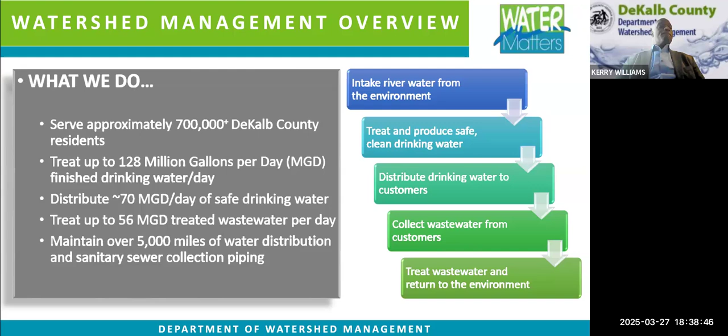And to serve you, we also maintain the system, which consists of roughly 5,000 miles of pipe, several pump stations, and a lot of other things that you can't see, but we do on a daily basis. Let's go ahead and proceed to the next slide, please. Here we have a schematic of the sewer system itself. As you can see, it's a gravity-fed system. You have a lateral that connects your house to the sewer system.

This is one of the places where we can get what we call I&I, infiltration and inflow, rainwater getting into the system, taking up capacity in the system. That is one of the issues that will be addressed by this project, putting in new pipe to get out the inflow and infiltration that's taking up capacity in the system. Right now, we're looking to be more proactive than reactive to avoid sewer spills that we've experienced in the past. And this is one of the first steps in addressing that, and also in compliance with the consent decree, which we are under right now. Next slide, please.

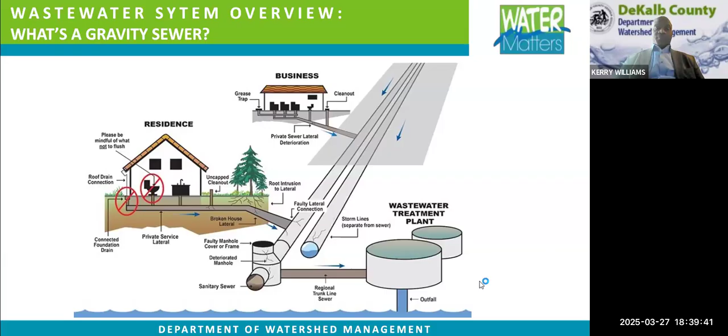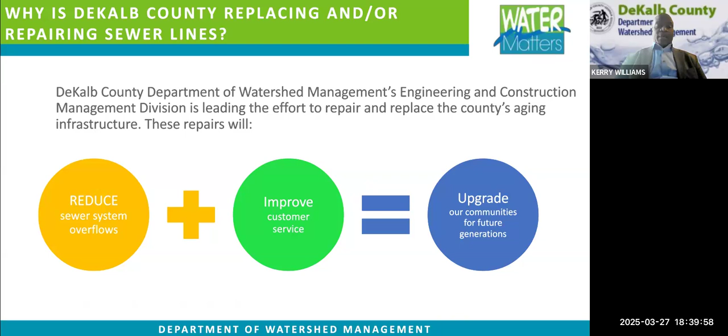So the DeKalb County Engineering Management, Construction Management team will lead this effort. The project has been designed, and we are moving from the design phase now into the full-blown construction phase. Next slide, please. To implement the construction of this, we have not only the DWM professionals that we have in-house, we also are assisted by professional consulting engineering firms and contractors, such as AECOM, Jacobs, Black & Veatch, Gresham Smith, CERM, Kimmy Construction.

You've heard a lot from me now, and so now it's time to really get into the project, the assessment of it, how we assessed it, the problems that we found, and what's going to be addressed with this. To do that, I'm going to turn it over to Ms. Alia Johnson, who is the engineering manager for ECMS, and she will give you assessment and problem. So, Miss Alia, the floor is yours.

Thank you so much, Kerry, and good evening, everybody. My name is Alia Johnson. I'm an engineering manager for engineering, construction, and management services. So my team is leading the design aspect of the consent decree project, including this project in Columbia Woods or Toney Drive. And today I'm going to talk about the assessment and the problem and explain to you all a little bit about why we need to do this project. Next slide, please.

So why do we need to do the assessment? Typically before we identify what needs to be done, we need to know what the problem is for this specific area. So I'm going to walk you through certain methods that we use to identify issues in this area. There's a more complex or more simple way of doing this. So basically the first one that I'm going to discuss in brief is the smoke testing. We did the smoke testing where we put smoke inside the sewer main, and this is to help identify the private connection or any defect in the sewer lateral.

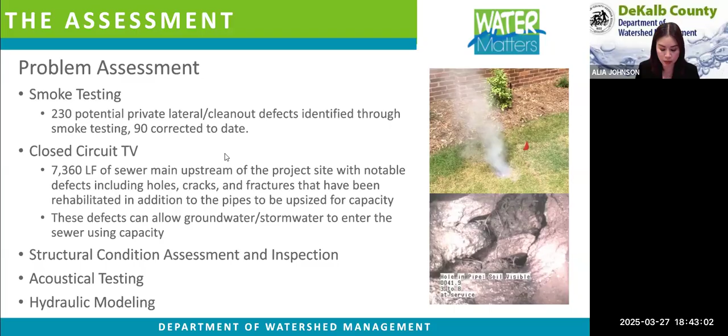So we did a little bit over 7,000 linear feet of CCTV inspection, and we have identified that the pipe has several cracks or fractures and holes within the pipe that need to be rehabbed, and some of them probably need to be replaced, and also increasing the size for future capacity. And some of the low-hanging fruits, from the visual inspection of structural conditions, such as the lateral clean-out cap that we need to replace, or the vented manhole lid that we need to repair to prevent the flow from coming inside our system.

And other methods such as acoustic testing to see blockage in the line, or the hydraulic modeling just to understand if the pipe that we have in the system has enough capacity, or do we need to increase the size to handle the future development. Next slide, please.

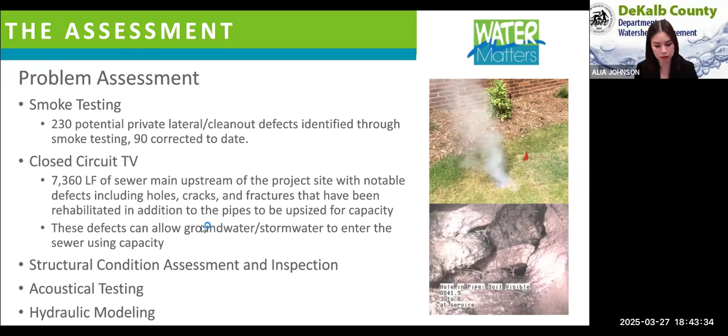And after the assessment, we have identified the problems in this area. Based on the record of sanitary sewer spills, or what we call SSOs, there is a history of repeated SSOs, 43 events since back in 2017 in this area. And the most recent one just happened last month, February 13. So because of that, when there's a sewer spill, we do need to address that, since we are under the consent decree, like Kerry mentioned earlier, and we need to fix the issues by a certain deadline.

And in this area, the first box, the priority fix list, PFL, is what needs to be completed, and this is required by the EPD. There is a specific address at Trasher Circle that was on the list by the EPD to be completed by a certain deadline. And also within this area, the aging infrastructure. As you may know, the sewer system is old; most of it is more than 70 years old. A lot of the time we can't clear the issues just because of the age of the infrastructure.

Next is the lack of capacity. I did mention earlier that we typically try to understand if the pipe in the system is enough to handle the future development in the next 50 years or so. So we need to look into the future so we don't have to come back and increase the size again. So this area does need to increase the size of the system.

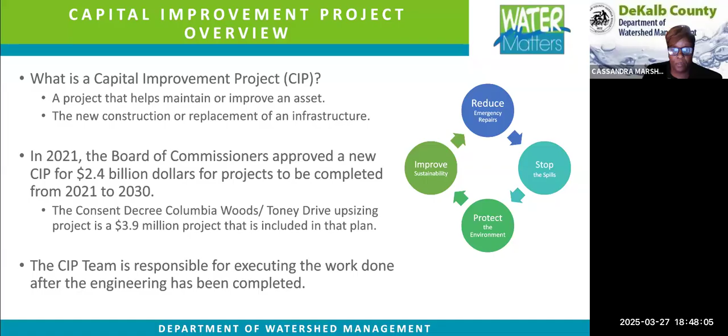You will now hear from Kian Baniassad about the project scope. Thank you, Ms. Marshall. Good evening, everybody. My name is Kian Baniassad. I'm one of the senior engineers with ECMS. I'm also the technical project manager for this project.

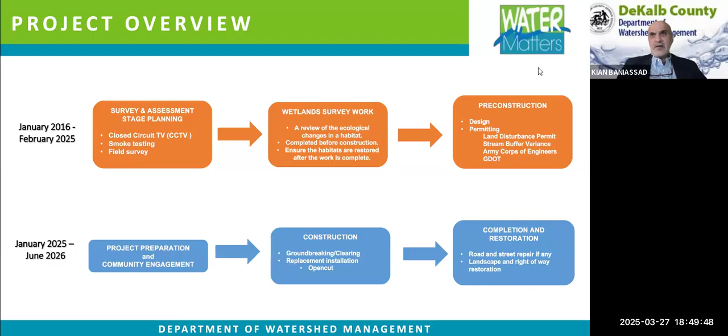This project includes upsizing approximately 458 linear feet of pipe with a 20-inch ductile iron pipe, 2,614 linear feet of pipe with 18-inch ductile iron pipe, and 19 linear feet of pipe with 8-inch ductile iron pipe, for a total of 3,091 linear feet of pipe that would be upsized. As part of this project, we are also rehabbing or replacing about 18 manholes.

Most of the installation will be performed by conventional open cut excavation or pipe bursting methods. During the construction, we maintain our sewer services by bypassing the area under construction from an upstream manhole to a downstream manhole using bypass pumping.

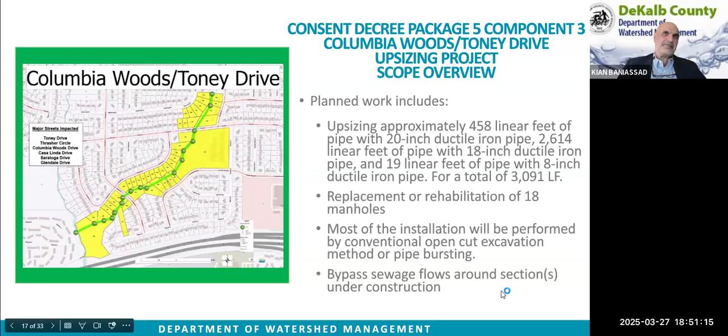At this point, I ask Mr. Arre Kennedy, the construction project manager for this project, to walk you through the construction phase of the project. Thank you. Arre? Mr. Kennedy? Sorry about that. Good evening, everyone.

As Ms. Marshall alluded to earlier, I'm a licensed utility manager in the state of Georgia, but I want to stress two points before I get into what my team and I do, which is the fun part. And that is we take seriously our 750,000 plus or minus ratepayers. And I also want to stress that in this project, there's going to be inconveniences. There's going to be noise. Sometimes, as dictated by the schedule, we're going to be working Saturdays. But we're going to work together in partnership with the community and the contractor to bring this job home.

As the others have said, you've heard the reasons, you've heard the engineering part. My team gets to have the fun part. We're boots on the ground. And we're responsible for the day-to-day operations of the actual installation of the pipe and the overseeing of the contractor, which includes but is not limited to the clearing within the easement, ensuring that erosion and sediment controls are in place, and that the pipe is installed in accordance with the contract documents, the county specs, and documentations. My team and I will also be enforcing the safety habits and the safety rules as they're applicable.

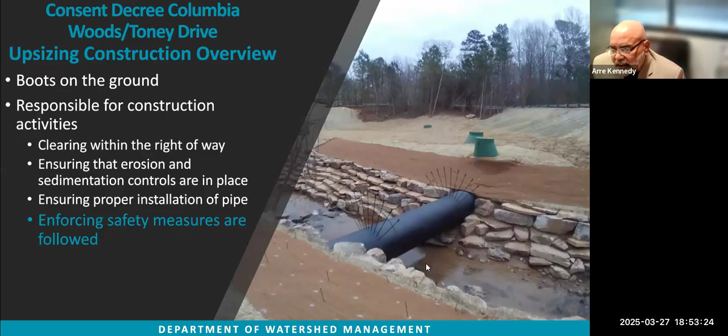Also, I stress that should any of the ratepayers have any issues, that you reach out to us first, the ones out there on the boots, and I assure you that we'll resolve the issue. The methods Kian alluded to briefly. The two methods are open cut, which you see to the left, where basically we're tearing up the real estate, trench box in place, putting the pipe in. The mostly trenchless method is to the right, where we pipe burst, and it's less intrusive and we don't have to tear up as much real estate where feasible.

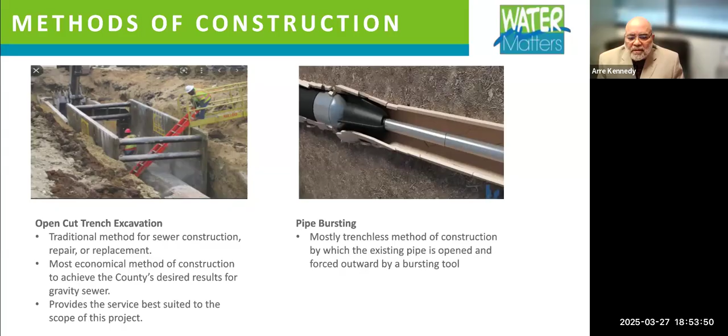The survey and staking has already been underway, as Mr. Kian stated. We want to have mobilization and actually start on this site April 1st. Start putting in access roads, clearing trees, putting in roads, all within the limitations of the easement, April 14th. In May, we want to start actual pipe installation with the contractor. That's actually when we want to start.

January 2025 hopefully will be completed, and February 2026, final restoration and paving. Right now, the end game date is June 2026, but hopefully with my team and the contractor and the weather, we can bring this project in even earlier than that date.

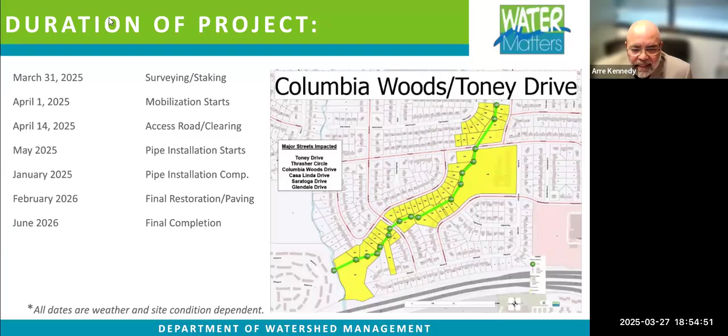As you see, this is a typical construction site, and this is roughly 3,000 linear feet, no small undertaking. As you see to the left, that's the actual construction entrance put in with your silt fence and stuff in place. To the right, we're going to restore it back in kind, if not better. Next slide.

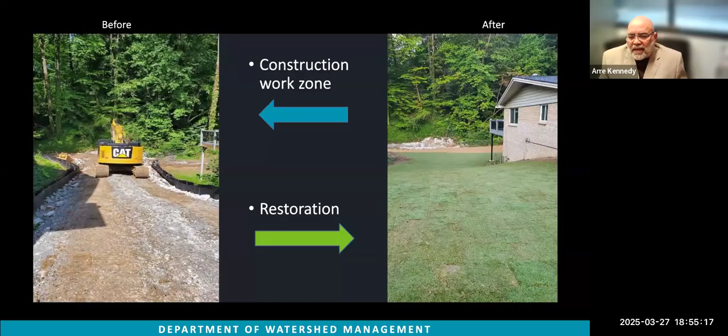I will turn this over back to Ms. Cassandra Marshall. Thank you. Thank you, Arre. I will now address the community concerns and what you should expect. Next slide.

So, like Arre said earlier, there are going to be inconveniences. However, the short-term interruptions provide long-term results. Once we replace the pipe in the area, as previously stated, these improvements should last a minimum of 70+ years. What you're going to see, though, is a lot of construction, a lot of traffic, foot traffic, and vehicles. There are going to be construction workers, surveyors, county employees throughout your community.

What also comes with this is the parking for the crews. They will be parked alongside the streets in your neighborhood and sometimes along the work zone. There will be material and equipment deliveries by means of large tractor trailers. However, the crews and the flaggers will guide these large vehicles in and out of the communities. Also, as an FYI, all of the county contractors and county employees will have an identification badge issued by the county, so you would know who is working for the county on behalf of DWM.

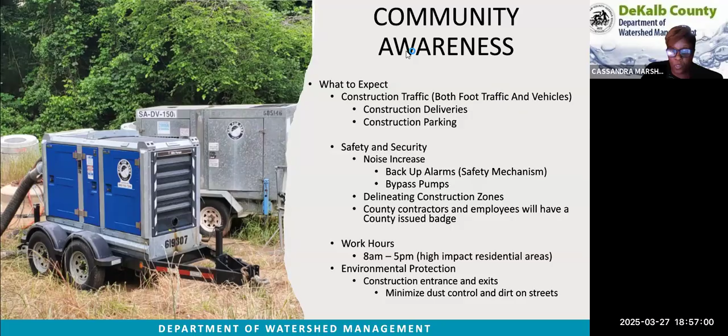There's going to be noise. The equipment is going to have backup alarms. The alarm has to be loud enough for the people in the work zone to hear. This is a safety mechanism. Bypass pumps will generate noise also. This photo is an actual setup of bypass pumps around a sewer manhole. The good news is for this project, the pipe installation will start downstream, and as we're installing the new pipe, we will slowly take out the bypass pumping once we get the new system in place and start putting the sewage back on the new line.

There's going to be dirt on the street. However, as an erosion control measure, the contractor will first install a construction entrance and exit prior to starting any activities. This will reduce mud on the street, but not fully eliminate the issue. If mud or silt is tracked on the road, then the contractor is responsible for sweeping and cleaning those streets daily. Our typical work hours per our contract are 7 a.m. to 7 p.m., sometimes weekends and holidays. However, in high impact residential areas, we will only work from 8 to 5 with the equipment.

And lastly, there will be clear delineation of the work zone. This is usually just shown by installing the black silt fence along the temporary or permanent easement and along the ingress and egress areas. Next slide.

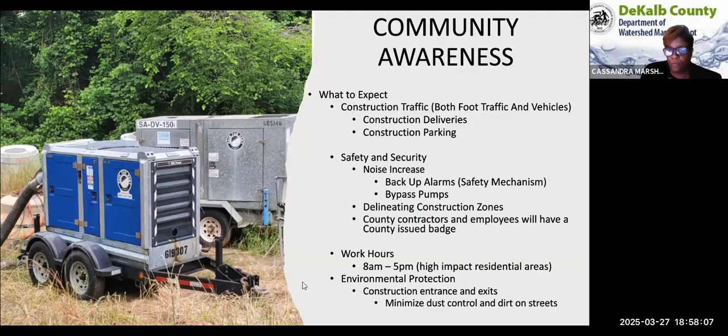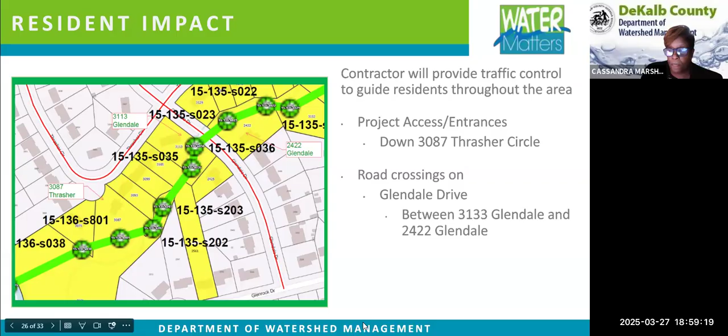So this slide shows resident impacts and locations the contractor will utilize as ingress and egress to the project site. The first location will be coming down 3087 Thrasher Circle. And then off of Glendale Drive, they would come down 3133 or 2422 Glendale for access. Next slide.

This is just a continuation to show the access to the project. The county does have a drainage easement at 3166 Columbia Woods Drive. They will use that as an access point. And lastly, off of Toney Drive between 3230 and 3220 Toney. Those will be access points also. Next slide.

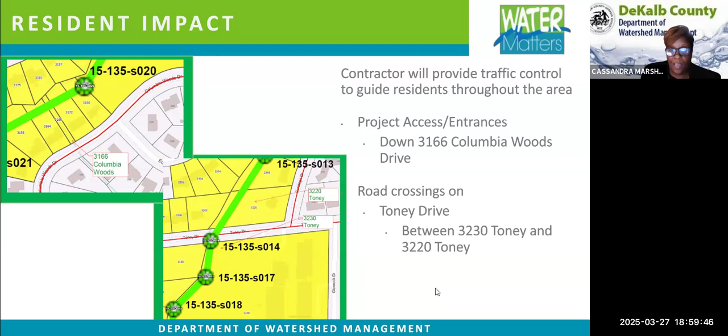Next, you will hear from Public Relations Manager, Ms. Alicia Penny, about public communications updates. Thank you, Ms. Marshall, and good evening, everyone. My name is Alicia Penny, and I'm the Public Relations Manager for the Department of Watershed Management. I've been with the department for over 20 years, providing communications and outreach for the department. And tonight, I will be sharing with you the ways in which we will communicate throughout the project so that you are informed about exactly what's going on as the project goes along. Next slide, please.